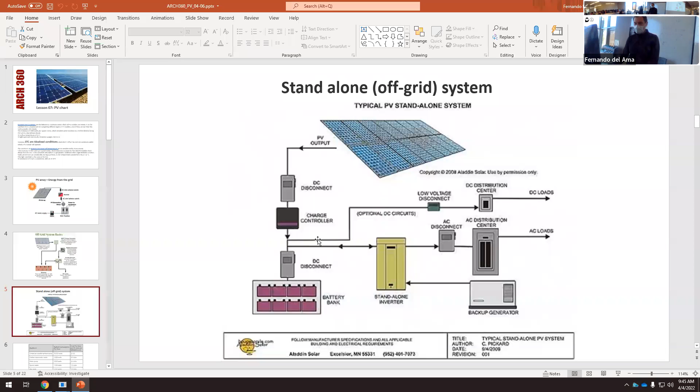But this is the first option we have to make: PV array with energy from the grid, or an off-grid system. The off-grid is the same as the standalone system. With the standalone system, basically we need batteries, and then we need the DC, the charge controller, the inverter—those are things we need for this option too.

Then we need to know the consumption of our appliances. Again, do we want to be sustainable? Don't use a clothes dryer, a hair dryer, a burner, or an electric cook. I know there are a lot of alternatives, but if we want to have the same appliances we're used to, like a hair dryer, or now I want to boil a couple of eggs for breakfast, okay, my electric cook.

If we want all these facilities, all these appliances, then we need to know how much energy they consume. Well, this gives us an idea of what we need. This is the watts—what is the instant consumption? And again, we have power and we have energy.

We have something that consumes a lot of power, the central air conditioner or heat pump. Basically this is the heating or cooling system. You see that this is the highest number in terms of watts. Is it the highest number in terms of energy? We have to multiply this times hours.

It's 4 cents per hour. If we use this 10 hours, if we're not using the monitor or the computer for 10 hours a day, that's 40 cents a day times 365. Let's do 40 cents a day times 365 days: that's 14,600 cents, so it's $146 a year.

So if you leave your home and you turn off your computer—this is just for one computer. If we have 3 or 4 computers on all day, at the end we're paying hundreds of dollars more than we should. And this is energy that we're wasting. We can't do that if we are off grid, because what's the point of using the energy we have in our batteries if we're wasting this energy?

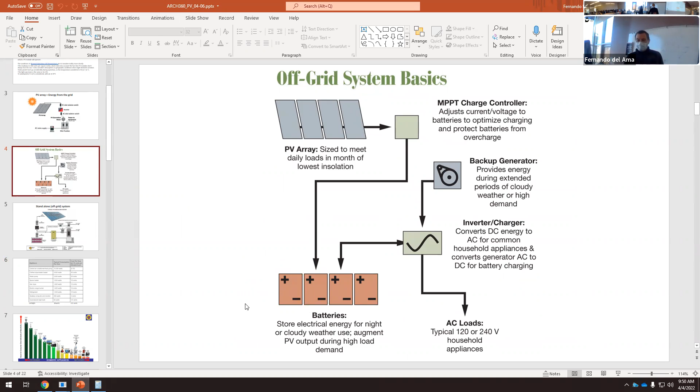So that's what I mean—if you want to live on your own, if you want to live off grid, you have to change your behavior. Probably leaving the computer on for 10 hours a day, even if you're not home, doesn't make any sense, because you'll be consuming this energy. And when you're connected to the grid, it's just about paying $100 or $150 more per year.

It's $10 per month. Can you afford it? Probably you can afford it. But if you're working with your own energy, if you're storing your energy in batteries, this doesn't make any sense. So we need to understand that we have power and then we have energy. This is the power that appliances consume, but to understand the energy, we need to multiply this by hours.

And a light bulb, if it's incandescent, it's 60 watts. If it's LED, it's 10 watts. So basically, if we're using LED lights, we're saving a lot of energy, especially if we have the LED lights on a lot of time. Nobody is using incandescent light bulbs anymore—everybody uses LED lights, and we don't have to do anything to persuade people to do that. It's natural. Why? Because they notice LED lights are more efficient, they last longer, they consume less energy. So when you have this, you don't have to give incentives or subsidies to use LED lights—everybody would do it.

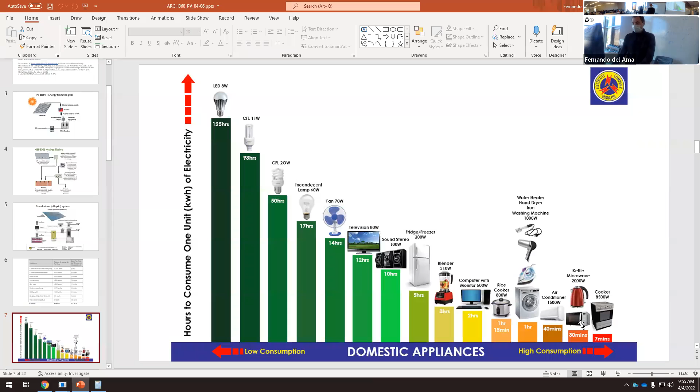So the first thing we have to do is understand the monthly demand, the electric monthly demand. It's very easy. We know the power of an appliance, then we multiply this by the number of hours that we use that appliance, and then we have the monthly demand. But if we want to calculate a PV system, this is the first thing we have to do: calculate the monthly demand of all the appliances.

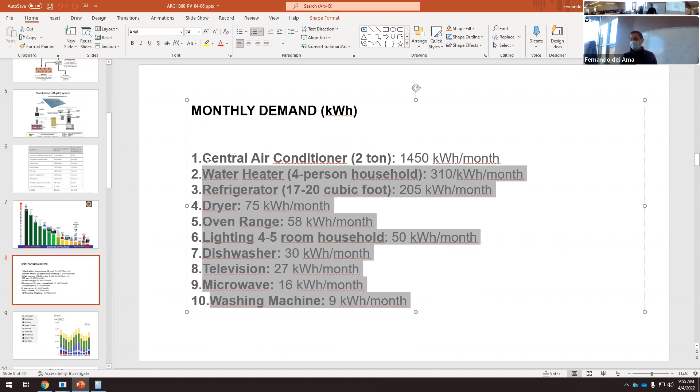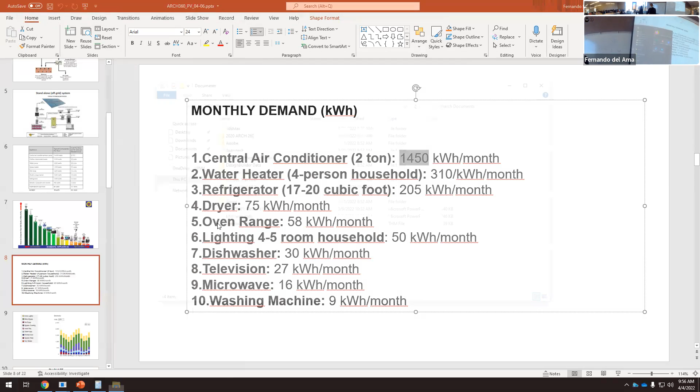So it's the power of the heating system times the hours per month that we are using it. For example, we are used to the heating system. If we open the Excel file, what we have here, this number is the heating load.

We have the area of the roof, the U value of the roof, and the difference, the temperature difference between indoor and outdoor temperature. So the value we have here is the power, the heating load is the power. And then we need to add up all this. We have the power or thermal load through the walls, through the floors, through the roof, through the windows. So at the end we have the thermal heating load, and this is what we call the peak heating load.

If we want to understand the energy we are using, we have to multiply this number by the number of hours we are using the heating system at home. And this is what we are doing here. I haven't talked about this part of the Excel file yet, but in this case we have the different months, these are the days per month, 31, 28, 31, 30, and so on.

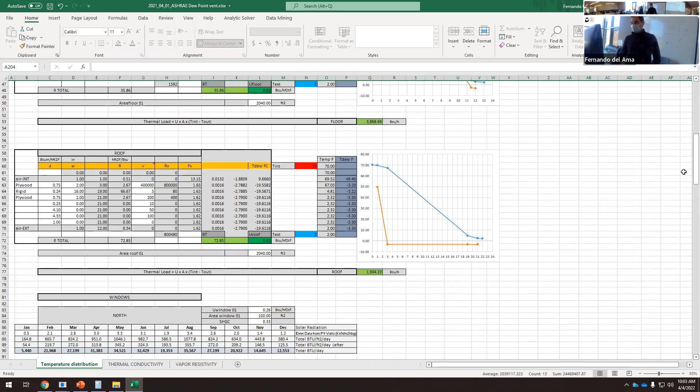And when we are calculating the PV array, we need to take into account the monthly values. We cannot calculate this with the peak load that we calculated using the lowest temperature in Keene. We have to calculate this with the average temperature in different months.

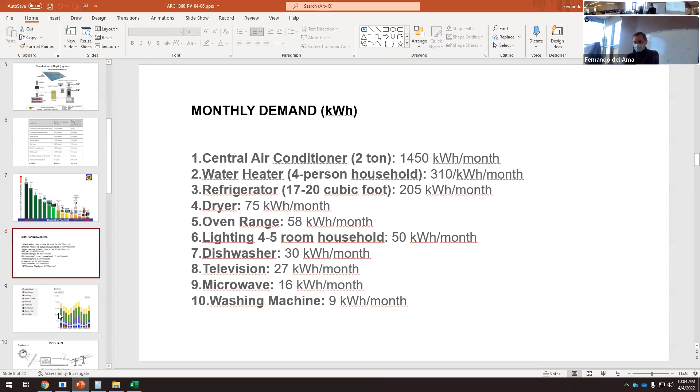When we are calculating PV arrays, we need graphics like this, on a monthly basis. We need to know the amount of energy that we are using, and if we are generating electricity, we need kilowatt hours. BTUs are not the units we need for calculating PV arrays - it's always kilowatt hours. So at some point, we have to turn this into kilowatt hours.

But just knowing the power is not enough. We need to know the energy. So we have to multiply power times the number of hours that we're using this device or appliance.

Before analyzing anything, we can calculate the potential PV production on our roof - that would be the maximum PV production we can have. That's a figure, that's fine. But if we want to match the PV production and the energy consumption, we need to break down the energy consumption into different months.

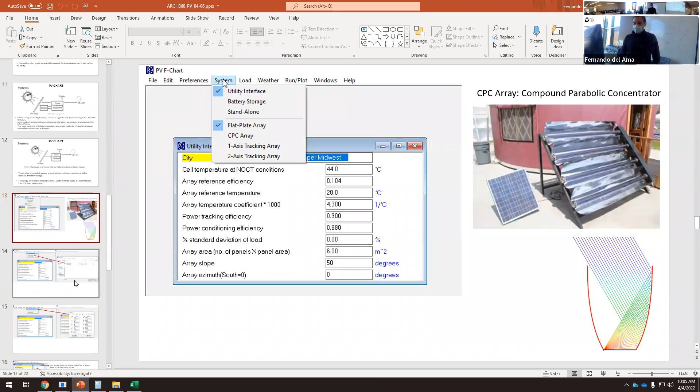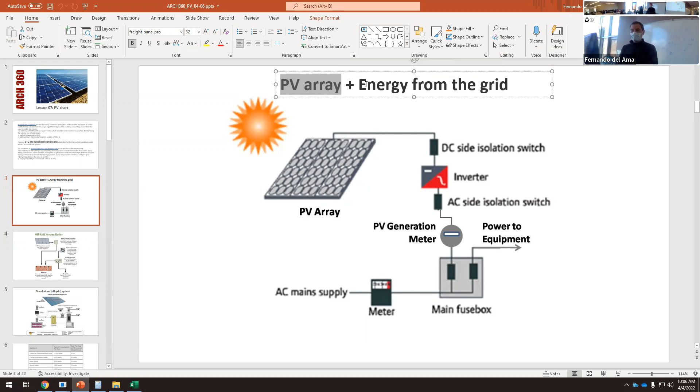And we can use F-chart, PV Watts, or Revit. So first, make a decision about this. Most of your projects would use this option: a PV array plus energy from the grid. We're not going to teach how to dimension batteries - it's too complicated. So we're going to decide on this option, but you have to realize that we have a PV array, and probably we won't cover 100% of our energy with it. So we need energy from the grid because we won't have batteries.

Second, we need this analysis. We need to understand if you're working with a residential building - you can do this with one apartment and multiply this by 50 or 60 apartments. So we need an analysis of the appliances we have in that apartment.

If we are in a public building, we have to do research. How many lamps do we have in every room? What's the power of this lamp? What's the power of the projector? What's the power of the computers? Well, we can take this.

A desktop is 400 watts. How many computers do we have here? 16. These computers are always on, by the way. So we have energy saving mode - when the computer has not been used for a few minutes, it enters saving mode, but it's still consuming some energy, probably not 400 watts, but maybe 50 or 60 watts if it's on saving mode.

We don't know, but these kinds of things are in the specification of the computer. What is the consumption when the monitor is on and the computer is on? And what is the consumption when it's in this saving state? It takes a lot - we need a database with all these things.

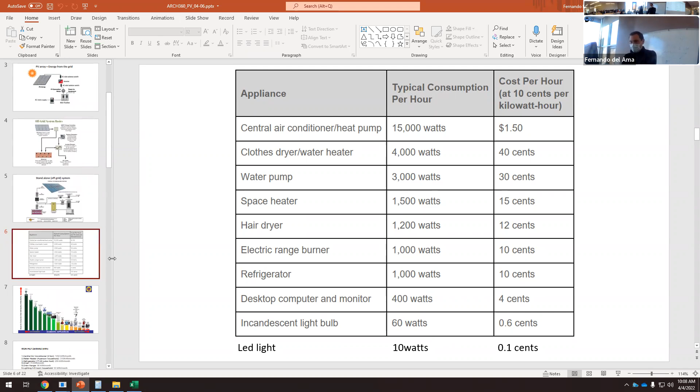But we can't have a good PV analysis without having this graphic, because the PV production will change and will be different in January than in July or August. So we have to try to match the energy production to the energy consumption. That's the biggest challenge we have when designing a PV array.

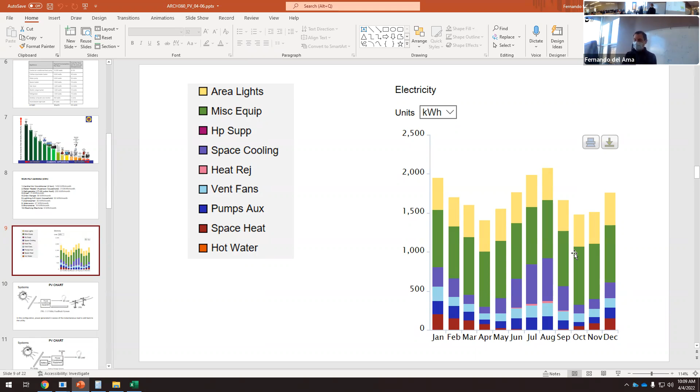So let's use this. Imagine we are working with this - we are just designing a PV array for heating and cooling loads, and this is the result. Here we have BTUs, 5 million. So the first thing we have to do is turn these BTUs into kilowatt hours.

If we want to do that, I have to unprotect the sheet. Okay, now it's not protected, and I would need another row here in kilowatt hours, and it's the other way around. So what's the conversion between BTU and kilowatt hours? We have to find out - BTU to kilowatt hour conversion.

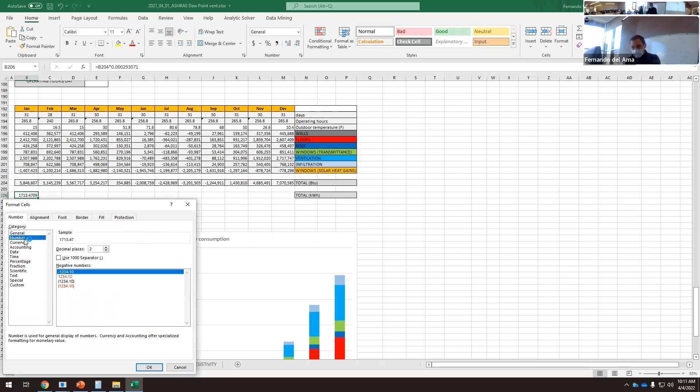So 1 BTU is 0.000... let's see. So that will be this times this number. Okay, now I want to format with just 2 decimals, and I do this. There you go.

So according to this, I'm consuming 1,700 kilowatt hours in January, 1,500 in February, 1,600 and so on. When we have negative, that means this is heating and this is cooling, but negative doesn't mean I'm not consuming - it's just a difference between heating and cooling. So this is the first thing we should do: turn our BTU energy loads into kilowatt hours.

Now let's use PV Watts today - the PV Watts calculator. We are in Keene, New Hampshire. So now we have to design the system size. The first thing we have to analyze is the tilt, the angle of the PV panels, and then we have to design the azimuth, which is the orientation of the PV panels.

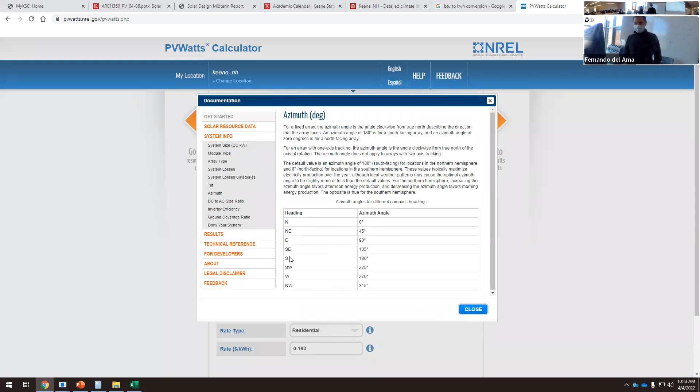180 would be the best orientation because that is south. If you want to orient your PV panels in other orientations, don't do it with north orientation - it doesn't make any sense. But if it's south, southeast, or southwest, we can change the angle here. So imagine we are using the default options - we have 180, and here we have 20 degrees.

And here we have the module type. I think I've explained that before, but anyway, we have the standard, the premium, and the thin film. What is the thin film?

Well, there are different technologies. What are the technologies of a PV panel? There are two main technologies. Thin film is one of them. What's the opposite to thin film? The crystalline technology. Okay, so this is what we are used to - 90% of PV panels are crystalline technology. It can be polycrystalline or monocrystalline.

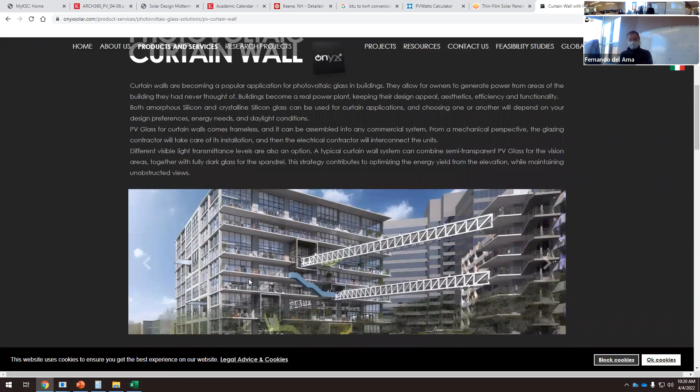So that would be the thin film. Okay, so if you have this, you don't notice that you have a PV panel here, but it's producing energy. So basically, the thin film—well, you can have different options for the thin film panel, but this is something you can do too.

I don't know if you notice, but in this case, we have the cells. So this would be the crystalline or polycrystalline panel, but the cells are not close to each other, so you have this feeling of transparency—a transparent glass with cells here. There are options; the most efficient way is using a crystalline cell, and crystalline cells are always something like that.

They are black or dark gray because they are made of silicon. If there's another cell here, they have to be connected. So those are two metallic connectors.

With the mono or polycrystalline cells, usually it's something like that. We have the black or dark gray cells, and then we have wires connecting them. At the end we have a positive, a negative, a positive, a negative. So at the end we connect all the positives, we connect all the negatives, and then we have tension between the positive and the negative. Here we have tension.

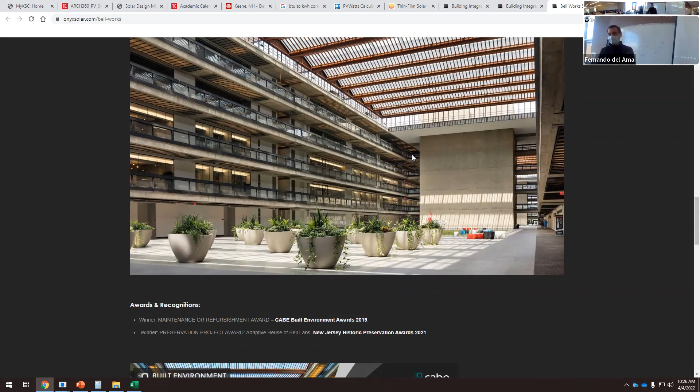Do we have more projects? I want to see skylights. Okay, those skylights seem like thin film panels because we don't see the cell. So we have a huge skylight with the right orientation. It's almost transparent, we can see through it. And here you see that we don't have the cells, so it's completely transparent. Probably that will be the thin film technology.

But basically, that's the difference between the crystalline and the thin film technology. With thin film you can have this sense of transparency, which is important. With the crystalline technology, it's not transparent. We can place another cell here - this will be the dark gray, and this is dark gray, and this is transparent. Again, the more transparent gaps between two cells, the less the production.

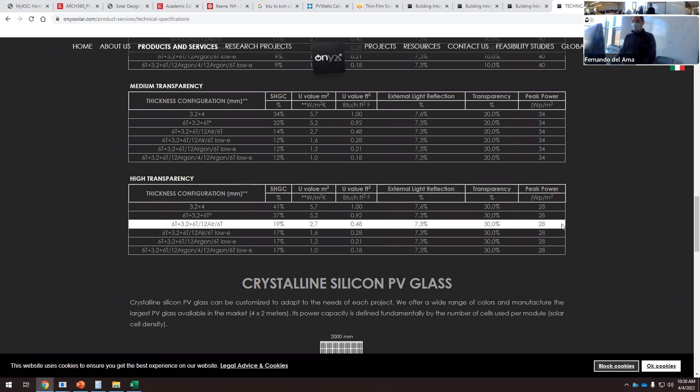Here we have 57.6 watts per square meter, then 40, 34, 28, and this is high transparency. The more transparent, the less the production. It makes sense - when we have something dark, the production is quite high, but if it's very transparent, the production is very low.

So this is the thin film, and they place the thin film at the beginning because they work for architects, and usually architects prefer the thin film over the other one. But they do have the crystalline silicon PV glass, and with this, they don't have information about the PV production here.

They had a wonderful calculator, but I think they don't have it anymore. They had a calculator to compare both technologies, but products, consulting - yeah, I think they don't have it available on the website anymore.

Anyway, they are working here in the United States, and this is one of the companies, Onyx, that are trying to integrate PV panels into good architecture. All the projects you see from them have something special - they are good architecture and good examples of integrating PV panels and architecture. So take a look at what they are doing, either with crystalline or thin film PV panels. They have a lot of examples of good integration.

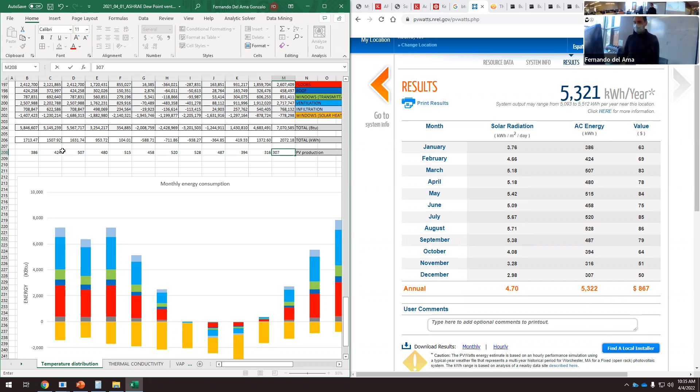So this is the PV production, and now we will have to type here this value. In January, it's 386. In February, it's 424, then 507, 480, 515, 458, 520, and further values through the months. Okay, so this is the PV production.

If we want to calculate the F factor, this is what we will do with the F chart. What's the F factor? It's the percentage of the total energy that we need provided by the PV panel. What's the formula for that? It will be this divided by the total energy and multiplied by 100. So that's the meaning of the F factor - it's 23%.

So I want to format this - is it 23% or as a decimal point? Well, if we don't include the 100, it's 0.23.

Well, if it's negative, it's just heating or cooling, but it doesn't affect. So what happens here? There's a month in which we are producing more than what we need, so this is more than 100% of the energy we're producing. Here we produce only 23%, 28%, 30%, 50%. Well, those numbers don't make sense because I haven't calculated anything feasible, it's just to show you how we have to work.

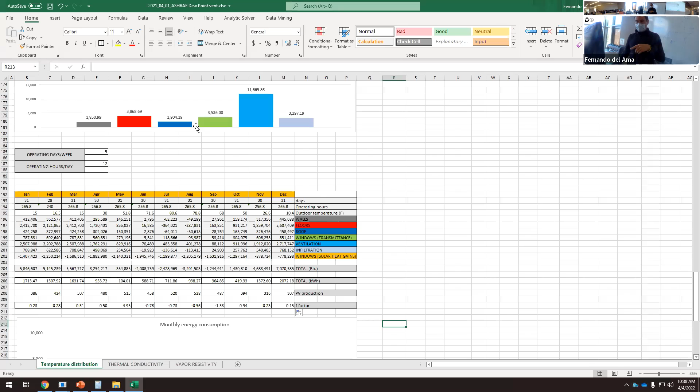I don't know the heating loads or the values I've used here. Usually when we calculate the F value with the roof we have available in our building, it's never more than 20-30%. I told you that this huge PV array we have here is around 30% of the energy needs of the building, because here everything is electric, heating and cooling is electric, lighting, computers, everything. So this huge PV array we have is only 20-30%, depending on the day, of the energy we need here.

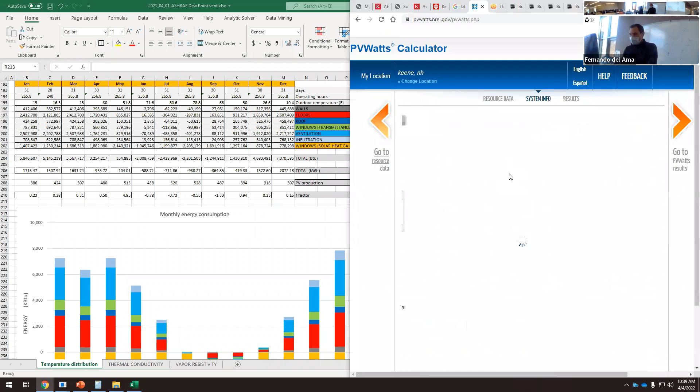The only thing I have to explain is where this DC system size comes from. We should look at the specifications - where is the Onyx? Technical specifications. This is the value we need for the PV array. This is a 57 peak watt, or watt peak.

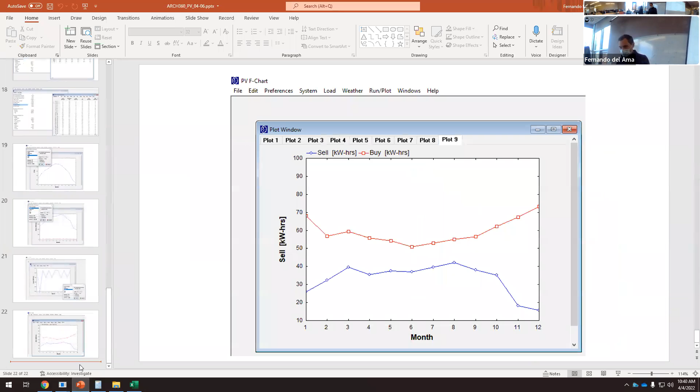If the peak production is 57.6 watts per square meter, how many square meters do we have, or how many square feet - each 1 square meter is around 10 square feet. So this is 5.76 watts per square foot. Because 1 square meter is around 10 point something, but it's around 10 square feet. So we produce 5.76 watts per square foot.

If the DC system size is 4 kilowatts, that means we have 4,000 watts. So what's the area of the PV array? It's 4,000 divided by 5.76. 4,000 divided by 5.76 is 694 square feet.

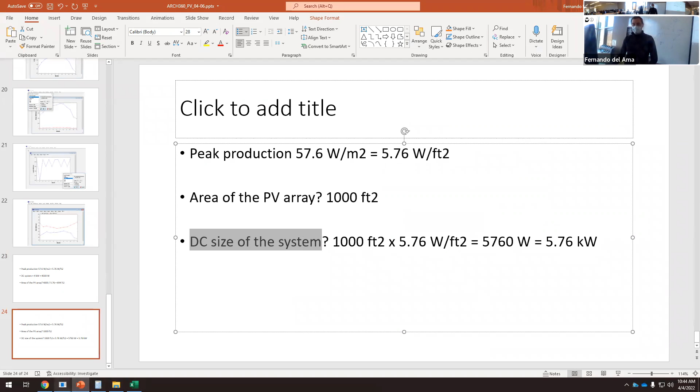So if you know the area of your roof, that would be the area of the roof, and this is the peak production of the panel you are selecting. Then you can calculate the DC size of the system, and this is the number you have to put here. So if you know the DC size of the system and the specifications of the panel, you can calculate the area of your PV array, or if you have the area of the PV array and the specifications of the panel, then you can calculate the DC size of the system. You have to place here the DC size of the system, it's 5.76, and then you run the simulation again.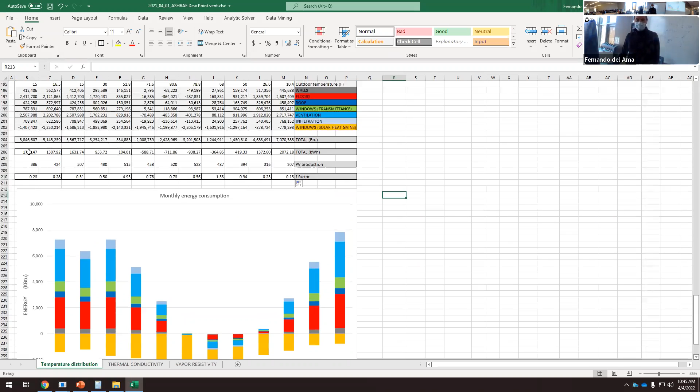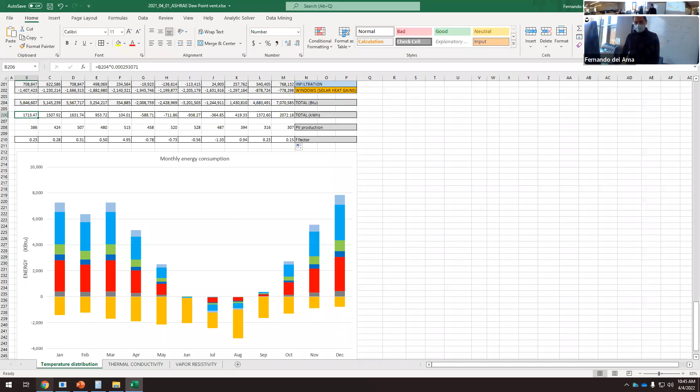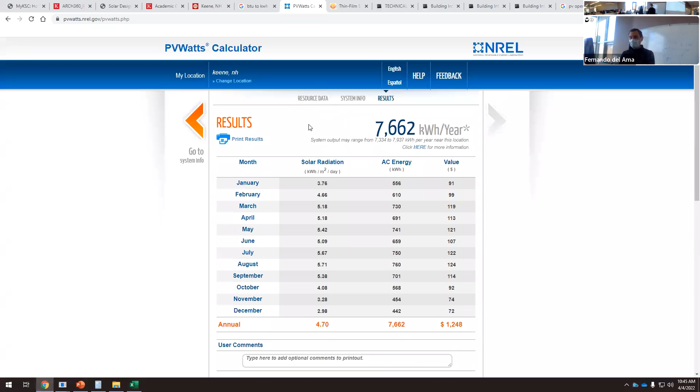And here you have different numbers, and then you can compare the production to the demand. So by doing this, we know if the PV production matches the demand, but on a monthly basis. The biggest demand is in January, or even in December - in December it's even bigger than in January. And the highest production is in July, August. It makes sense - the highest production is when we have sun, but the biggest demand, if we're using this for the heating system, is in January. So how can we match these two things? We will see.